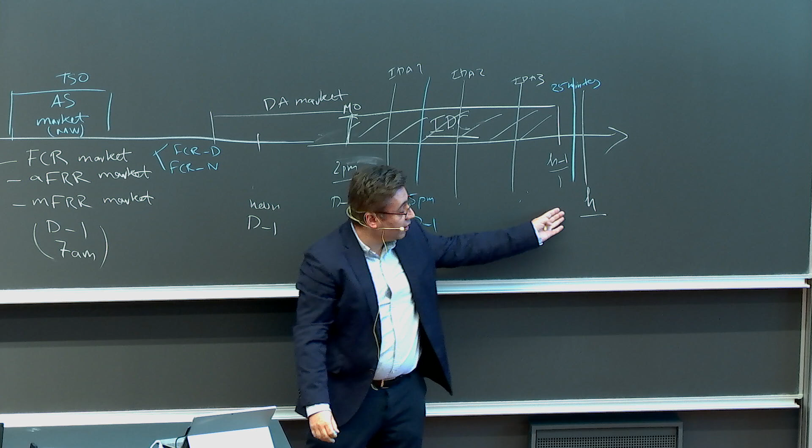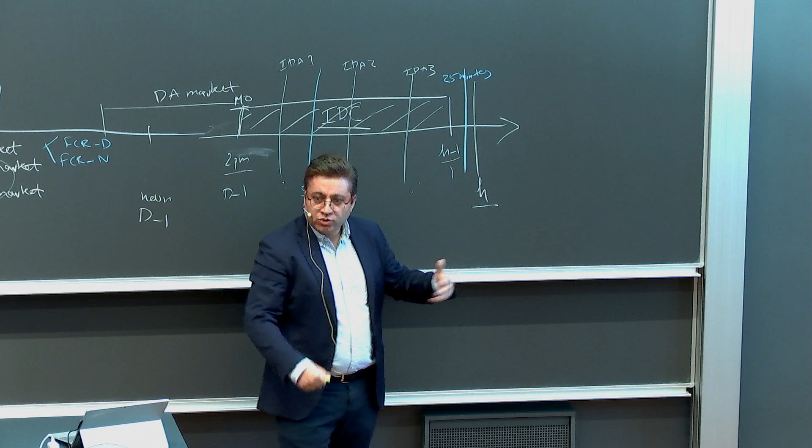So you start from 5 p.m., something like here. So 5 p.m. D-1 is the first time that you have to submit your activation price, and you can update it up to 25 minutes ahead of time. And then for mFRR and aFRR, the TSO just checks who submitted for upward activation, meaning, for example, generators have to produce more. The TSO starts activating the cheapest ones until the imbalance is resolved. And the activation price of the last resource activated sets the balancing price.

But this is changing at the moment in the Nordics and in Europe, because now we have activation for both mFRR and aFRR, so the definition of balancing price is changing to reflect energy activation of both mFRR and aFRR. I didn't teach how it works, but it's good for you to know that. Good. And then we have imbalances, the balancing market. We discussed that now in Denmark and many European countries, the balancing scheme is based on a one-price scheme, while it used to be a two-price scheme.

And we discussed that under the one-price scheme, there might be incentives for some producers to intentionally cause imbalance if they realize they can earn more in the balancing market than in the day-ahead or intraday market. And for that, last session, in lecture number 6, we discussed that Energinet is adding something called full cost balancing. So if you cause an undesired imbalance that doesn't help the system, you should pay not only for energy activation, but also your share of the TSO's cost to procure services to resolve your imbalance, right? So you will be charged for energy activation and also for reservation.

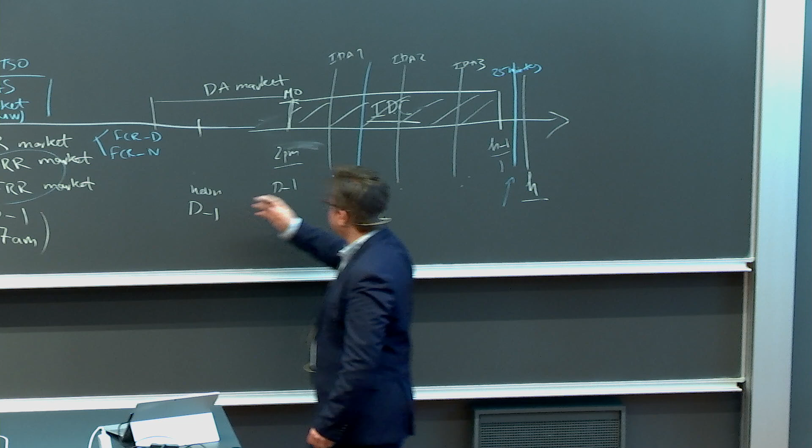Good. Then we discussed that everything we discussed, or in your assignment, the market time unit is 1 hour, but all markets either have been changed or are going to change to 15 minutes. So soon the time granularity for all markets will be 15 minutes. Already ancillary services and IDC have been changed to 15 minutes. For the day-ahead market, under Euphemia, it's going to change next June. Good. Are we missing anything we discussed? Of course, we discussed many things, but do you remember anything else?

Good. So this is the overall picture of electricity markets in European context. And yeah, of course, there are more details that we discussed in the last lectures.

Good. So now let's move on with the lecture of impacts of renewables on electricity markets. So here today I will try to explain you the impacts, the challenges, potential solutions, and also the initiatives that are happening in Denmark, Europe, and maybe globally.

Good. So these are the numbers I got from Stine Rasmussen from the Danish Energy Agency. This shows the Danish energy sector in 1998. Based on this slide, you can see that in 1998, 93% of supply in Denmark came from thermal power units, and only 7% from renewables. You can see the amount of CO2 produced from the Danish energy sector in that year, and also the fuels that supplied power plants in Denmark in that year, mostly based on coal.

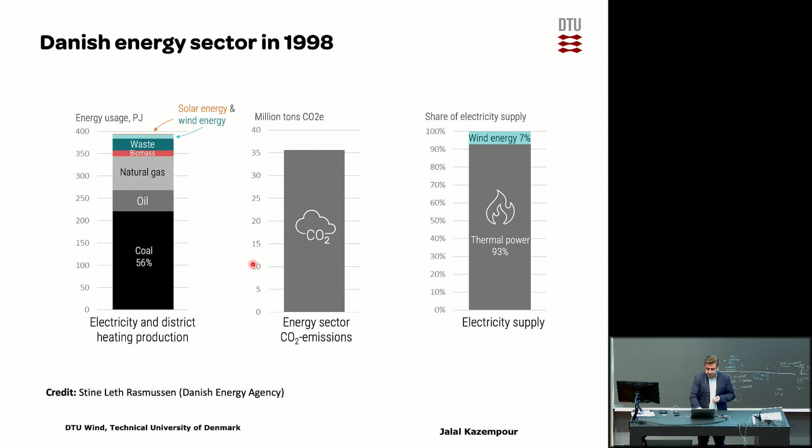And these are the numbers from 2 years ago, 2023. It has been radically changed compared to 1998, right? Now you can see that in 2023, the majority of Danish supply came from wind, 58%, on top 11% from solar. So in total, what? 69% from renewables and the rest from thermal power plants. And of course, the amount of CO2 produced reduced a lot. And also you can see the fuels for the Danish energy sector in 2023.

It's a radical change. And when we talk about systems with high penetration of renewables, this is an example. And the Danish target is to get 100% renewables, right? There are a few countries with that goal, or close to that: Denmark, Ireland, Spain, Germany, and so on. And maybe also some other countries in other parts of the globe.

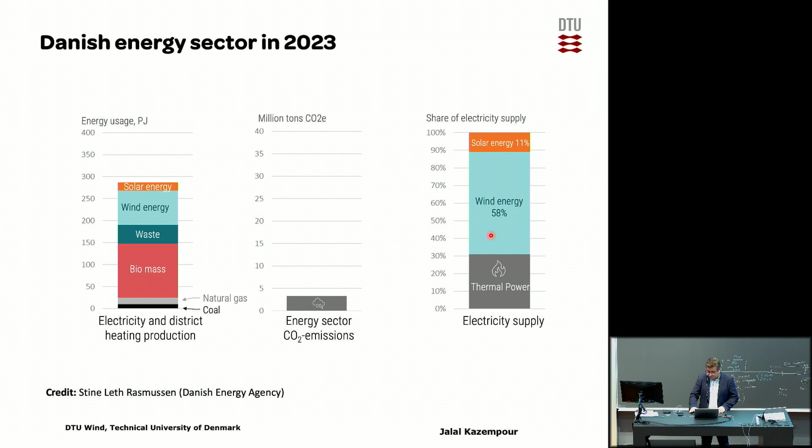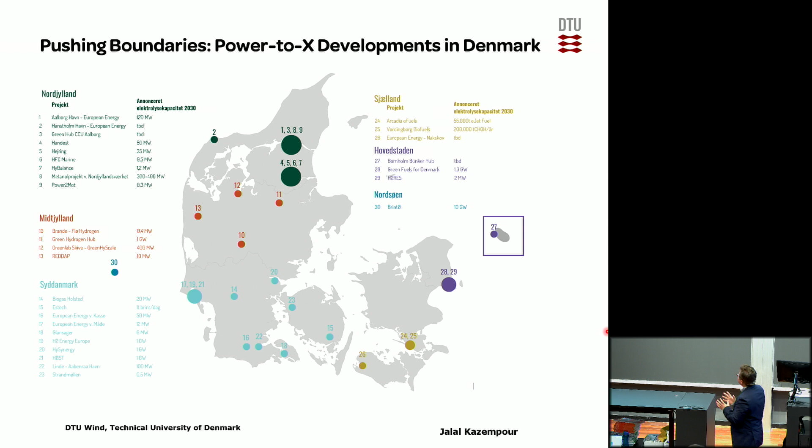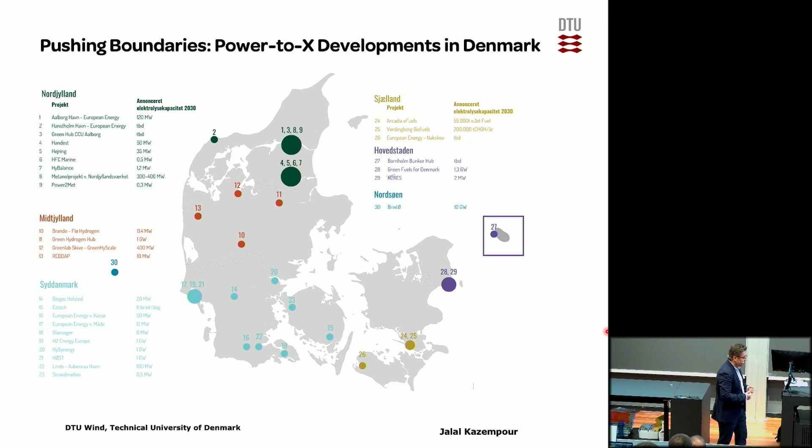So it's not the only ambition in Denmark to get 100% share of renewables in the power sector, but there are other ambitions. For example, these are the ongoing Power-to-X projects to be developed in Denmark. At least this has been the plan. And based on this plan, we expect that by 2030, in 5 years, we are going to have 4 to 6 gigawatt installed electrolyzers. And what do electrolyzers do? They convert electrical power to hydrogen. And then you can use hydrogen in downstream processes to produce different types of green fuels.

But just to get an idea what 4 to 6 gigawatt means, the current peak demand in Denmark is around 5 gigawatt, 6 gigawatt, right? So if we really manage to get 4 to 6 gigawatt of electrolyzers, it means that just in 5 years, the power demand in Denmark will double, right? It's very ambitious. And then you can see how much the government in total would like to support these initiatives and how much CO2 reduction is envisioned.

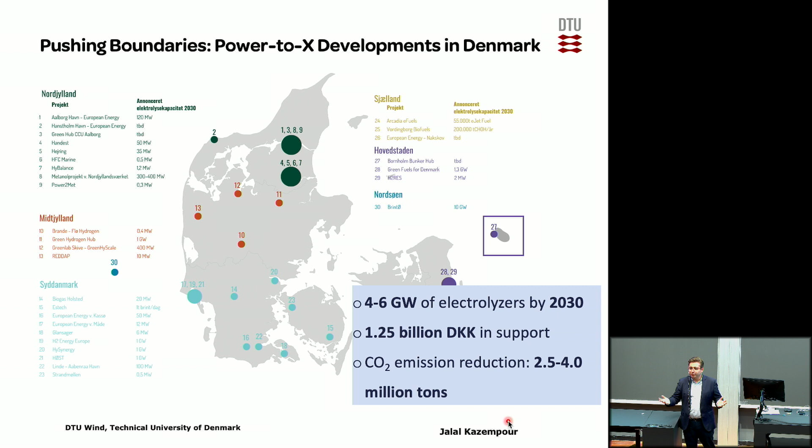So when I was teaching this course 2 years ago, everyone was talking about Power-to-X. It was really a hype, as much as people today talk about AI. But today, there are a lot of ongoing discussions on whether all these projects are financially viable. If you talk to project developers or bank people, they use a word called bankable, whether these projects are bankable or not. Maybe you are taking a course called feasibility studies at DTU, and I think it's this kind of context. Is a project financially feasible or not?

So as far as I know, the problems of the ongoing projects are not necessarily technological, it's more financial. Especially because the investment costs are still high, and also there are questions about financial risks, right? So they became barriers for P2X projects. Whether these projects will be realized or not, I hope they will be. So it's more a matter of time.

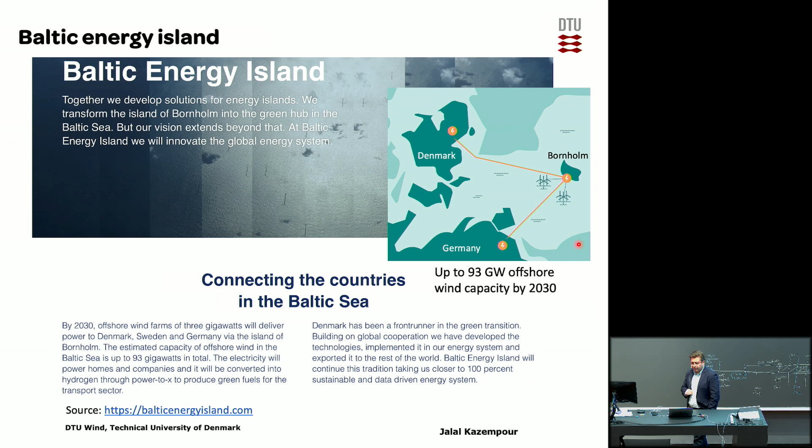The second ambitious energy island project, which has been discussed a lot, is an energy island in the North Sea. And the idea is to build an artificial island here in the middle of the North Sea where the water is shallow, right? The sea is shallow. So you can see that back in February 2021, when I was teaching this course 4 years ago, there was a lot of news, for example, in BBC, explaining, okay, Denmark to build first energy island in North Sea. And it was a big hype.

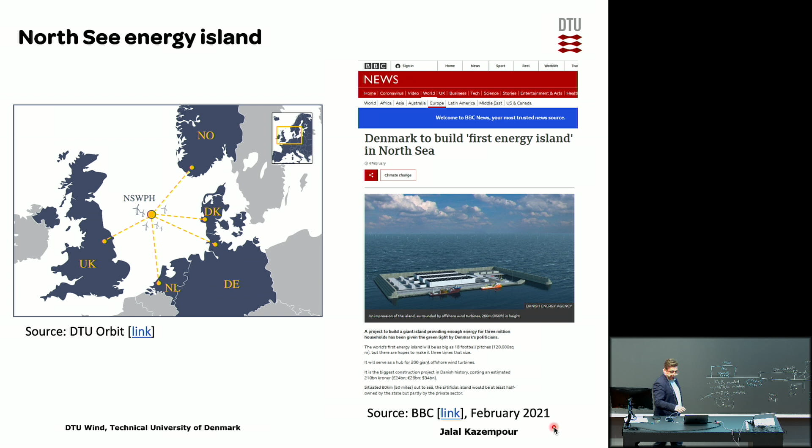So again, I hope I'm not wrong, but I don't think the barrier is technological, more it is financial. But anyway, you can see how ambitious projects we are talking about. And all of them are based on renewables. So you can imagine that renewables are already impacting electricity markets a lot. And this is going to be even more in the coming years if we manage to bring energy islands or

others to the picture. And of course, if you get that massive amount of renewables, you definitely need network. You need transmission grids, and also you need power-to-X projects. Maybe to produce hydrogen on site or in the mainland. So for that, you need to transfer power to the mainland and then make it hydrogen or other green fuels. Or maybe you can do it on site.

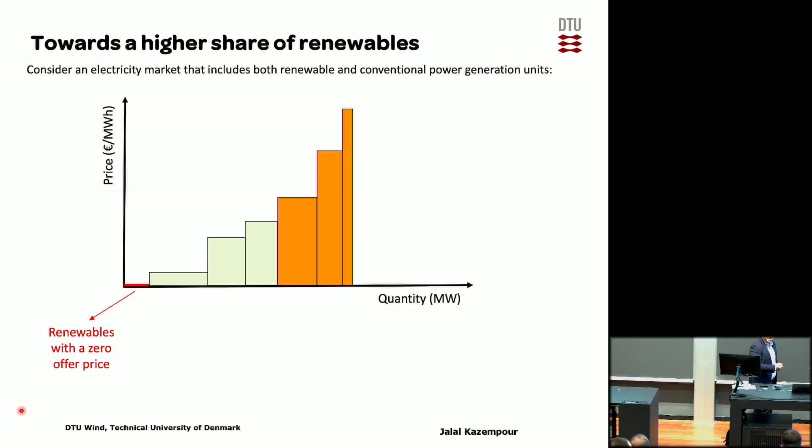So let's now talk a bit more about electricity markets. So that's the supply curve we already saw in this lecture several times. So let's say that the red part in the supply curve is renewables with a zero offer price. You already saw in the page of aggregated curves of Nord Pool or EPEX that there are many hours where many suppliers place a zero bid or even negative, right? Why do they go negative? Because they already receive tariffs outside the market. So it makes sense for them to offer negative and make sure that they will be dispatched.

And then the green ones, you can say that they are conventional units, so they need to burn fuel to produce, right? Or maybe they have other commitments, whatever. But usually they are conventional units, and usually they are less flexible or inflexible units. For example, they might be nuclear or coal power plants.

And then the orange ones are conventional units with relatively high production cost, and they are typically flexible. For example, they might be gas-fired power plants. And since gas is usually expensive, their marginal cost, their offer price here, is high.

Good. So let's say that in a certain hour, this is the amount of demand we have. Of course, we also have a demand curve. You already saw it in the Nord Pool page. But imagine that here the demand is fully inelastic to price. So that's why it's a vertical line. So then, if this is our demand, then the market price is there, the intersection of the supply and demand curves.

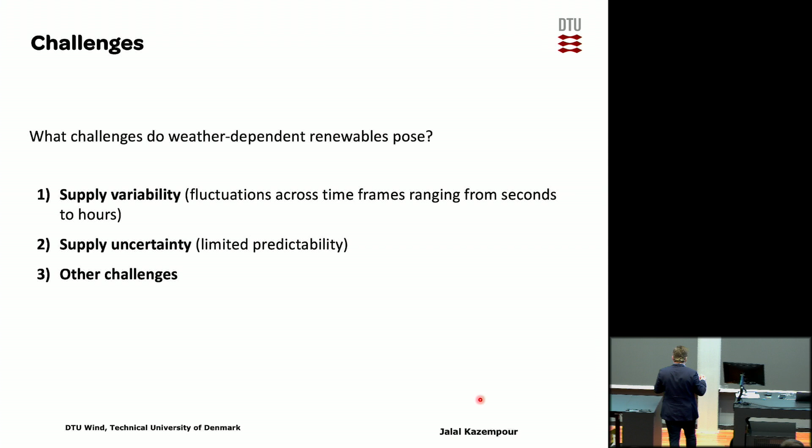In this slide, what I really like to emphasize is that uncertainty and variability are two different things. Many times I see that people confuse them and use them interchangeably, but they are not. When we say renewable energy is variable, we are not talking about stochasticity. We are just saying that over time, the wind energy in megawatt hours might be something like this. Over time, there is variable production.

But stochasticity means that it's challenging to forecast it beforehand, and if you want to forecast it well in advance, it becomes even harder. So if you like to forecast for the next day or the next week, it's something like this, or even bigger uncertainty. For any production here, this range shows a distribution of potential production.

For example, it might be a distribution something like this. It means that most likely the production will be this. It's a distribution function, right? But any production in this range might be possible. And here I put a large range. Sometimes it's very uncertain how wind or solar power production will be. So I hope it's clear how variability and uncertainty, or stochasticity, are different. Clear? Good.

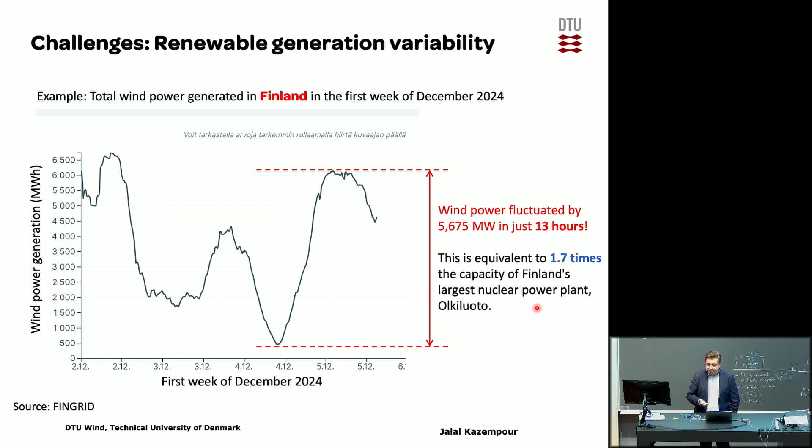Or this is another example from Belgium, and I got this data from Elia. Also, Elia provides a lot of good information and visualizations on their website. So this is February 2021. I kept this figure from 4 years ago when I was also teaching this course. And you'll see that in that specific month, the minimum of the total wind power production in Belgium was 40 megawatt, and the maximum was 2,159. So a huge change in wind power production. So you have to be ready for that.

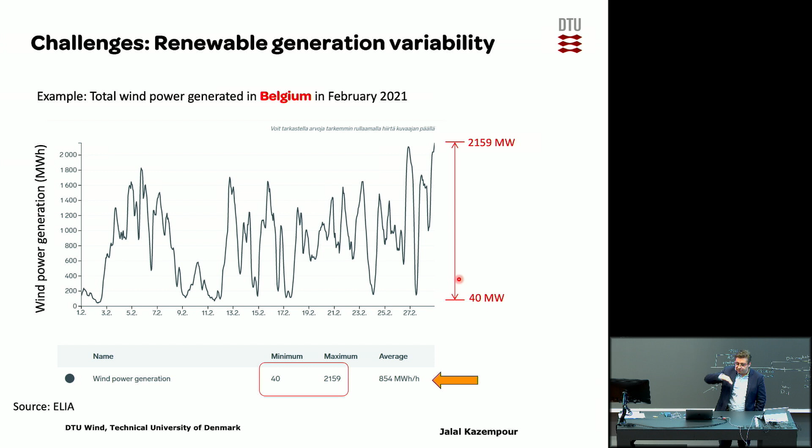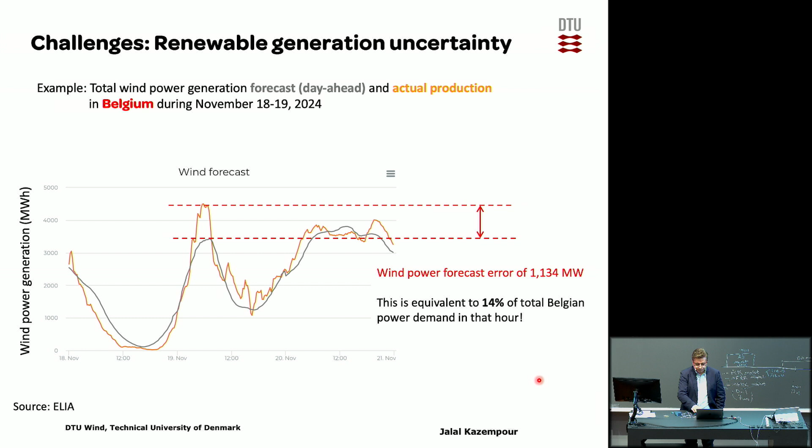So when you have a huge amount of renewables, you should think of ways to solve challenges coming from variability and also uncertainty. Can you think of other challenges? The lecture is about impacts of renewables on electricity markets, right? What other challenges do we have?

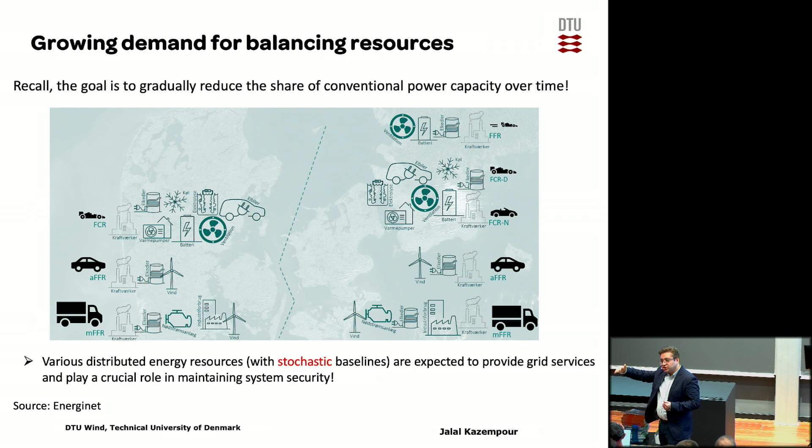But that baseline is stochastic. For example, imagine you control thousands of EVs in your portfolio, and you can provide FCR services. But how much FCR you can produce depends on how much these 1,000 EVs will consume every 15 minutes of the day after. Do you know it a day before? No. Is it easy to forecast? Not necessarily. When do you need to submit your bid for FCR services? A day before. A lot of stochasticity.

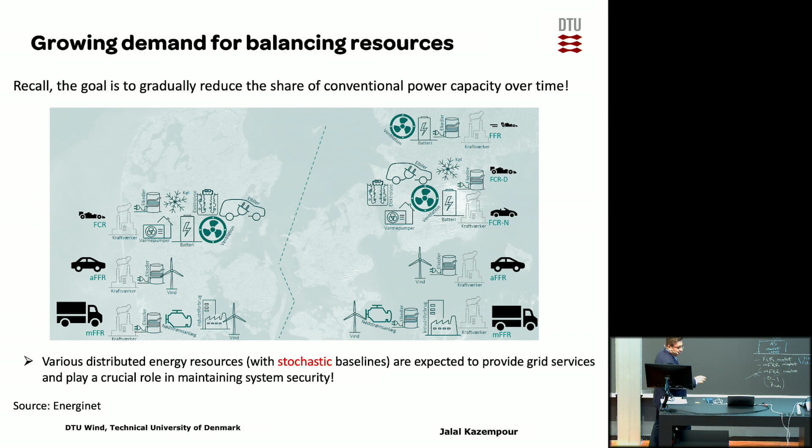Good. The other problem that renewables pose is grid problems. It's not directly a problem from renewables, but to be able to transport renewable energy, you need grid. Well, first think of big projects like energy islands, either in the Baltic or in the North Sea. If you manage to produce a lot of wind power in the middle of the sea, you need a way to transport it to the mainland. So building new transmission lines itself is a big project, both technologically and also, most importantly, financially.

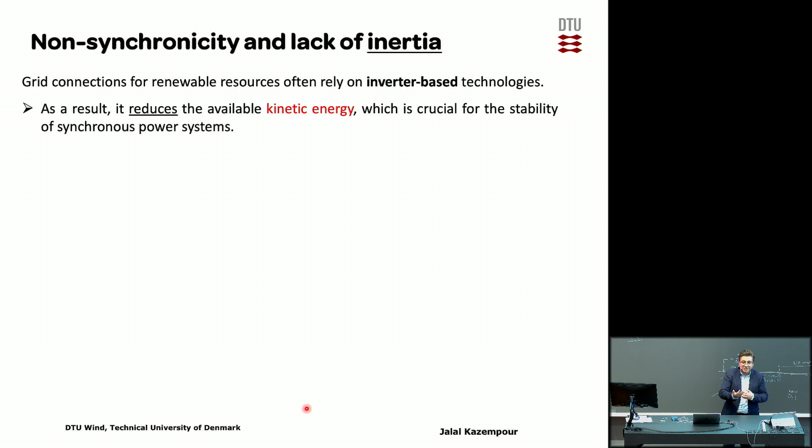Well, for example, that's a figure I got from this ENTSO-E report, European Network of Transmission System Operators. It shows the effect of amount of kinetic energy on the behavior of frequency after a loss of production with and without FCR. So let's say that we have FCR services. We activate FCR, but how is the profile of getting frequency back to the nominal of 50 hertz? So you can see how fluctuating it is when we have less kinetic energy in the system, less inertia in the system, right?

So having low inertia systems because of more and more renewables is a problem. But again, it's out of my expertise. But our colleagues, especially in control theory and also fundamental power system colleagues, are working on something called grid forming technologies, still based on power electronics, to help improve the inertia of the system. Okay?

So you can see that adding more and more renewables poses a lot of problems in terms of variability, uncertainty, market problems, grid connection problems, and also stability problems. And we should be able to find solutions for all of them. If we don't find solutions for all of them, then it becomes a barrier for more integration of renewables.

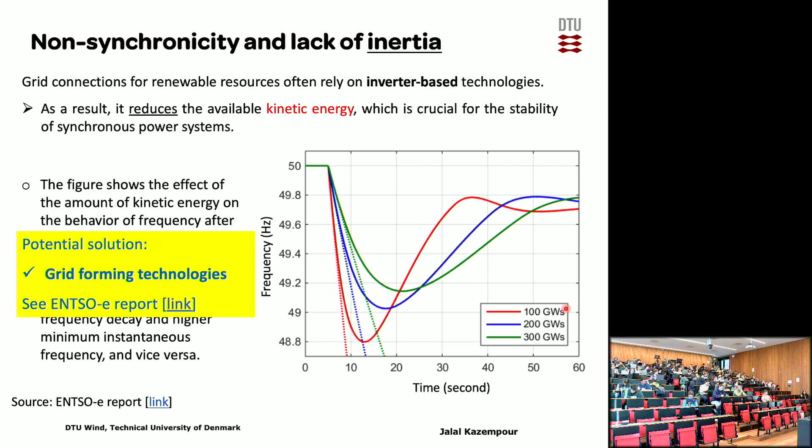There are. Yeah. For example, these grid forming solutions. There are good solutions. Okay, what I'm saying is also a personal opinion. I think for most of the challenges, we have good technological answers. The main barrier is the financial problems, I would say. So that's why learning about energy economics and markets helps, right? So for most of the challenges, I think we have technological answers, not financial answers. Did I answer your question? Good.

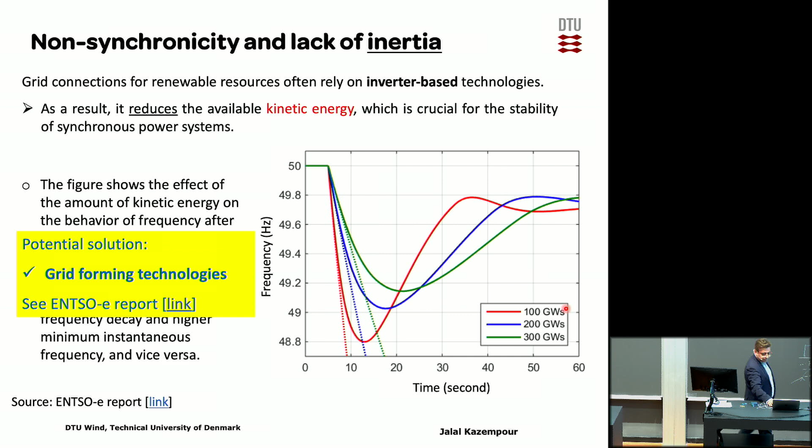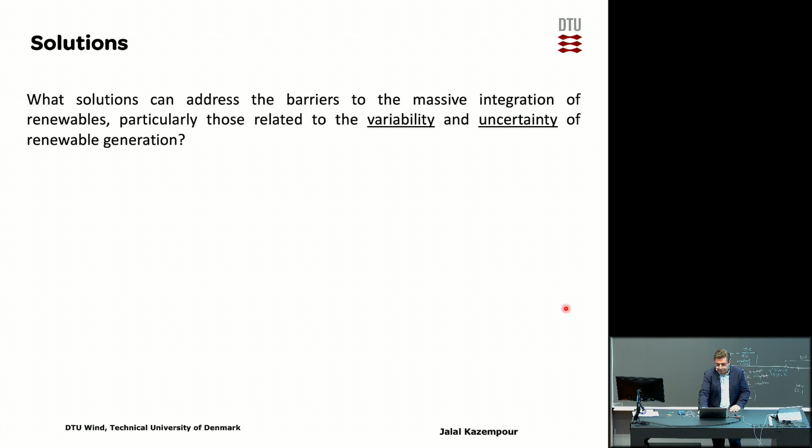I'd like to share some solutions with you, but I'm not saying that these are all the solutions. Some of the challenges still have open questions about how to resolve them. But here I mostly focus on challenges related to variability and uncertainty of renewables. So let's get back to the market context. For our challenges, we can think of different solutions: defining new market actors, new players, I'll give examples. Maybe we can think of exploring new resources for balancing, if the problem is the balancing resources.

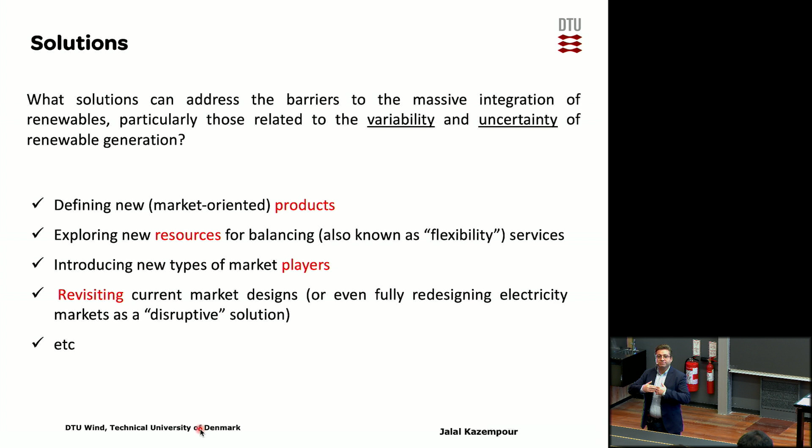Maybe we can think of new products. For example, FCR is a market product. Intraday trading is a type of market, and the bid is a type of market product. Maybe a bit more radical thinking: maybe we can think of revisiting current market designs. And of course, when we're talking about revisiting, you can think of very radical changes. Maybe you can argue that in 10 years, the way we clear markets today, based on what I explained to you, doesn't make sense at all, right? So these are open questions, actually.

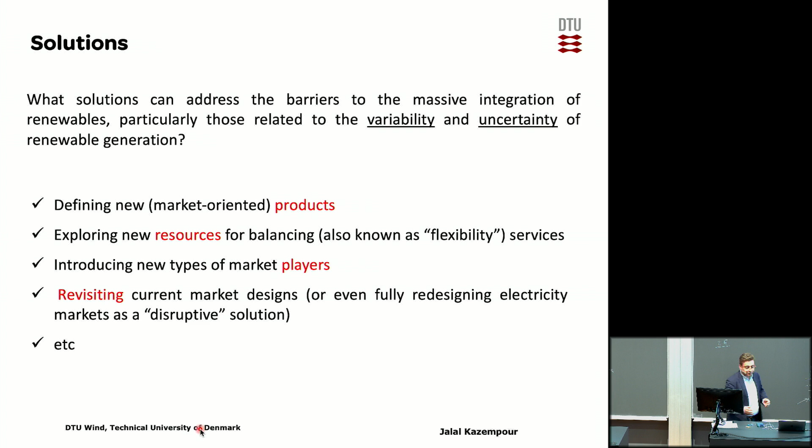So let me give you a few examples. When I say new products, what kind of products am I talking about? You saw the duck curve in California, right? So CAISO started thinking, oh my God, I have to do something. In the duck curve, you saw the net load change. In the matter of 3 hours, there is a need for a 13 gigawatt increase in supply. And as I said, the problem is the lack of ramping capability, not the lack of generation capacity. Maybe our generation capacity can handle this ramping in 6 hours, not in 3 hours.

So because of this problem in California and later in MISO, the Midcontinent Independent System Operator in the Midwest, they started adding a new market product called Flexiramp, standing for Flexible Ramp Product. Have you heard of it?

So that's a new product to be able to solve the problem. One way of thinking is that, okay, we have ramping problems. Do we have enough capacity in generation? Let's go and invest in more very fast responding generators. That's one way of thinking, but very costly. The other way is thinking in a more market-based, market-oriented way. So here they define this product.

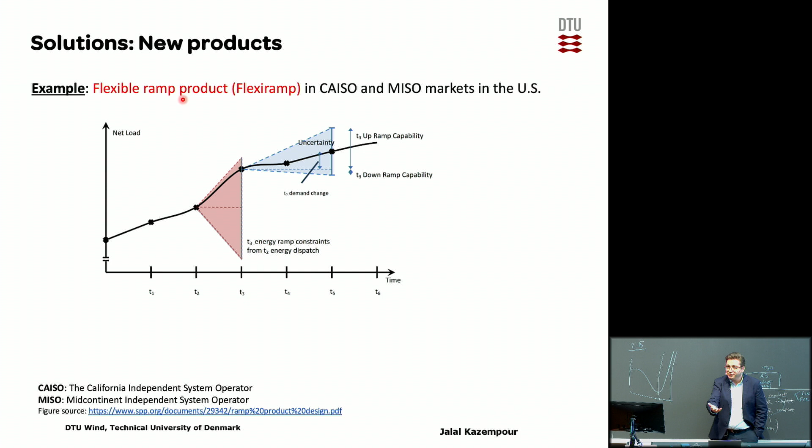What it shows is that, for example, based on the net load forecast, the system operator, for example CAISO, reserves a certain amount of flexi ramps at hour 3. So you see that at hour 3, we can have a forecast of how much the increase of net load will be. You can have different scenarios. And then you reserve some fast generators for providing ramp in certain hours.

So for example, if you have a very fast responding generator with a capacity of 100 megawatt, you can say that, okay, I pay you, don't dispatch at full capacity of 100 megawatt. Let's, for example, dispatch you 50 megawatt and leave 50 megawatt of you for increased change in production in 2 hours. Is it ancillary services? No. It's a ramping service.

Are you following me? And of course, here there is opportunity cost because we are asking this generator to not be fully dispatched in the day-ahead market, for example. We keep them ready for sharp increase when we have problems. So of course, for this flexi ramp, we have to pay that generator. So in the US, in California, there is a market for flexi ramp. There is a price for flexi ramp. And then generators bid based on their opportunity cost. Is it clear?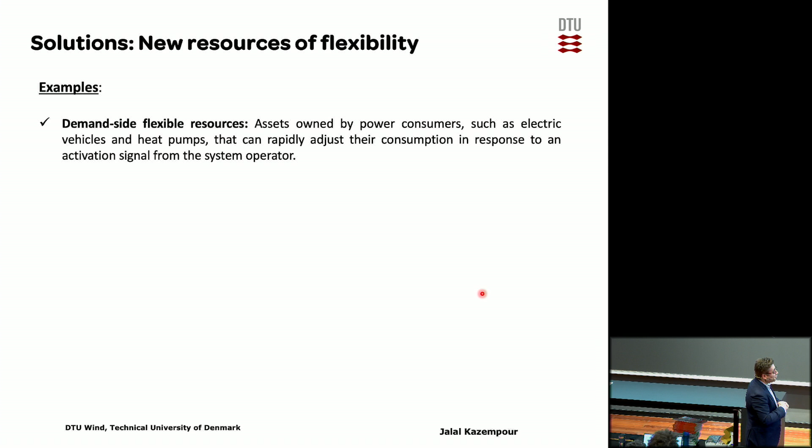Or water pumps. If you want me to name a few companies, you can think of IBM, for example. They are active in Denmark to design something called Flex Platform, that pools different assets and then offers different asset service models. Or different companies like Neogrid or others.

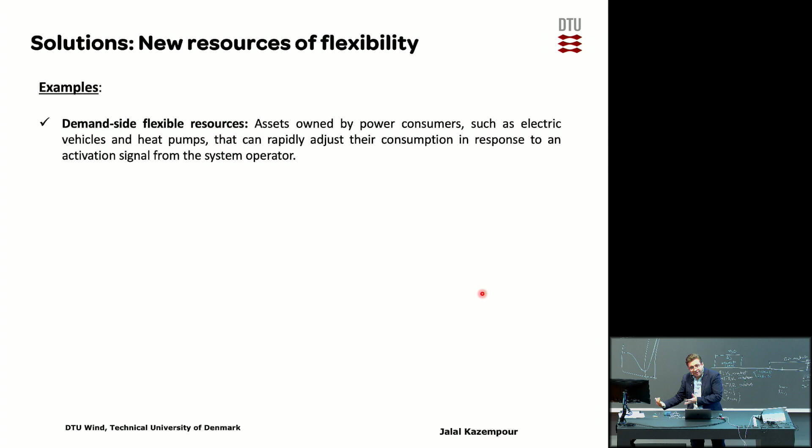And mathematically, their problem is also very interesting because they have to pool different assets, manage uncertainty, make decisions under uncertainty, and bid in the different markets while forecasting what the price will be. Very interesting decision-making problem, while fulfilling the physical constraints.

One important thing that I mentioned, maybe in lecture 2, is that most of these resources are located in the distribution grid. For example, electric vehicles or heat pumps. And if you would like to provide ancillary services like FCR, mFRR, these are services for the transmission system operator, for the TSO.

So what happens is that if we have frequency problems or imbalance problems, the TSO will activate these local resources in the distribution grid, right? So maybe the TSO's problem is solved, TSO is happy, but maybe activating them will cause local problems to the DSO. So TSO is happy, but DSO is unhappy. What happened? So here, that's why TSO-DSO coordination is very important, is essential.

So to be able to fully leverage the flexibility of demand-side resources, we need to make sure that TSO and DSOs are coordinated. For example, one easy way, maybe easy is not the right word, is that to be able to go and bid in the FCR market, you should get eligibility qualification, a green light from the DSO. You say, okay, I want to bid maximum X megawatt in the FCR market, then first the DSO should check it. If that happens, will there be any local problems or not? If not, the DSO says fine, green, go, and then you go and participate in the TSO market. That would be one way.

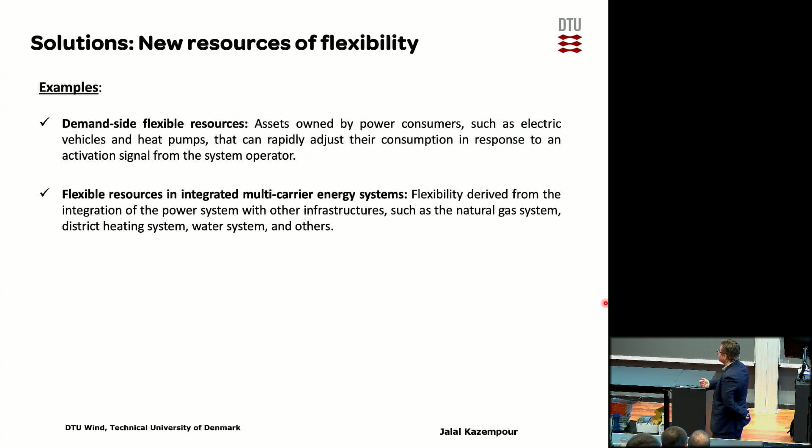Another resource of flexibility is multi-carrier energy systems, right? For example, there are assets in the intersection of the power system and other systems. For example, the heat system. Think of heat pumps. Or natural gas, gas-fired power plants. They are flexible, but they are also connected to the gas network. They are gas demands, right? Or maybe you can get flexibility from the water system by tuning the power consumption of water pumps in the water system.

So, for example, you can think of combined heat and power units, CHPs. You have one in DTU campus, right? A small one. So a CHP can produce power and heat at the same time. But you can play with that: how much power, how much heat to produce, and at different operating points there are different efficiencies. Right? So whenever in the power system you need flexibility, maybe you can play with the CHP schedule, with the CHP set point, and get flexibility from that.

But what is the cost, or what is the problem? By doing that, you are also changing the heat production of the CHP. So maybe you are propagating your uncertainty from the power system to the heat system. You're just propagating your problem to a different sector. So before doing that, you have to make sure that the heat sector is ready for that. Are you seeing the problem? So what I'm talking about is a systemic risk.

People think that if we integrate more and more sectors together, it's good. The system becomes more resilient. We can get flexibility from the heat system, from the gas system. So in the power system, if we have problems because of renewables, we get flexibility. But what we sometimes don't see is that we are propagating our uncertainty from the power system to the heat system, to the gas system, to the water system. It is fine as long as they are ready and it doesn't cause problems in other sectors. Otherwise, we may just be propagating the problems from one sector to another.

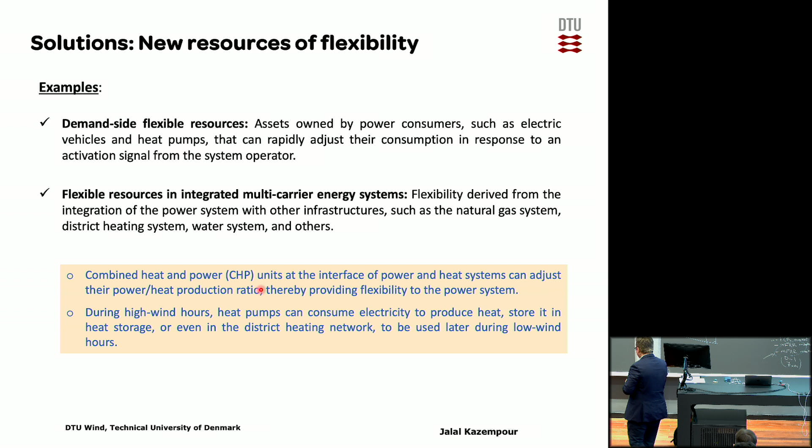Is it clear? And in the worst case, what will happen is cascading failure. The power system fails, now we push the failure to the heat system, and it will fail. So that's why, again, to fully exploit this flexibility, proper coordination between the power system operator and the heat system operator is essential.

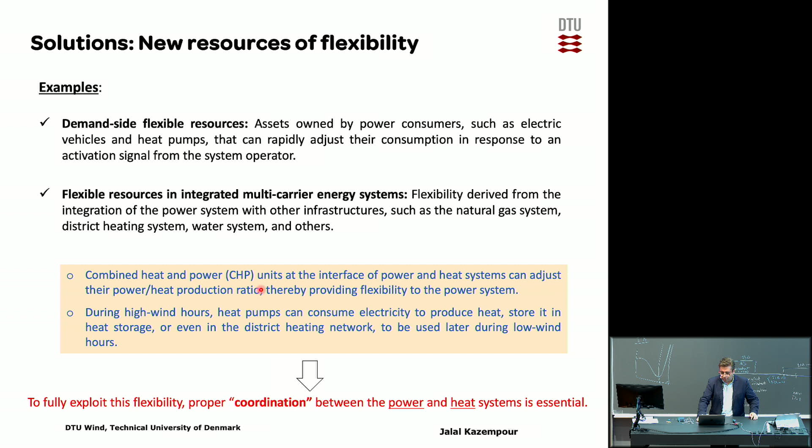Or you can think of the same for gas power plants. Gas units, gas-fired power plants, can provide us flexibility. So when we see fluctuations in the power system, we can ask a gas power plant to kill the imbalances, right? But this means that the gas demand is also fluctuating. So then maybe we are going to have problems in the gas network.

But there is one extra degree of flexibility in the gas network, and the same in the heat sector, I forgot to mention. And it's the stored gas or stored heat in the pipeline. The stored gas in the pipeline we refer to as linepack.

Right? So maybe, as I said, the gas demand is changing because of the variant gas consumption of gas-fired power plants. But maybe having linepack, stored gas in the pipelines, helps us to keep the gas network balanced and working healthy. So to be able to use this flexibility of linepack, again, it's essential to have proper coordination between the power system operator and the gas system operator.

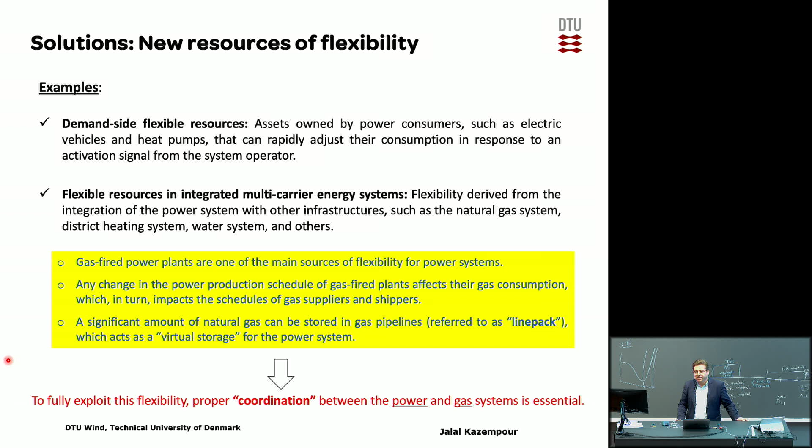Also, you can think of electrolyzers, power-to-X assets. Electrolyzers are consuming power to produce hydrogen. Are electrolyzers flexible? Yes. But you should be careful of the degradation. But the problem is that most of the time, electrolyzers may have a constant contract with hydrogen off-takers.

So maybe you are not very flexible to play with the consumption of the electrolyzer, because the more variability the electrolyzer consumption has, the more variability you have in hydrogen production. Of course, you can say that I can have a hydrogen storage, but it's very expensive and hard to have it, right? Good.

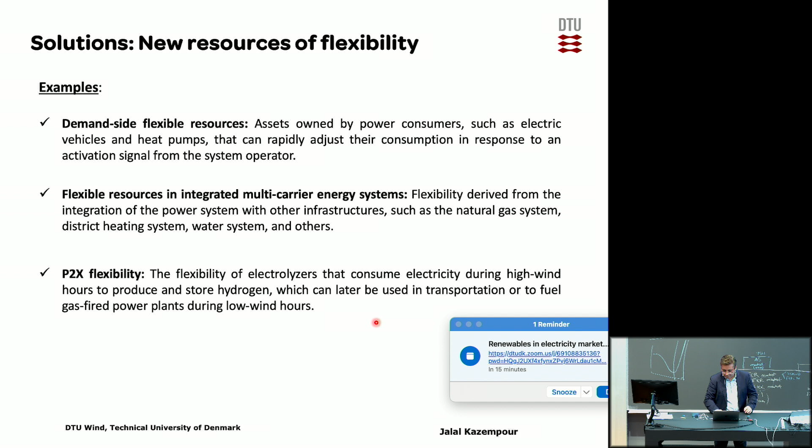He graduated. So his job was exactly to see how we can pool different types of flexibilities from different assets, bring them to the Flex platform, and then bid in different markets. So you can think of, for example, a pool of 1,000 EVs. We did that. Also, you can think of one big plant, industrial plants, for example, as a big demand consumer.

So we checked a plant in Jutland for steel and also for a galvanizing process. It's a big thermal plant. And then you see how much flexibility you can get from that plant for electricity consumption. Okay? So they have a furnace, and you see how much flexibility you have for that plant, and you can play with the consumption of that plant to produce different types of, for example, ancillary services.

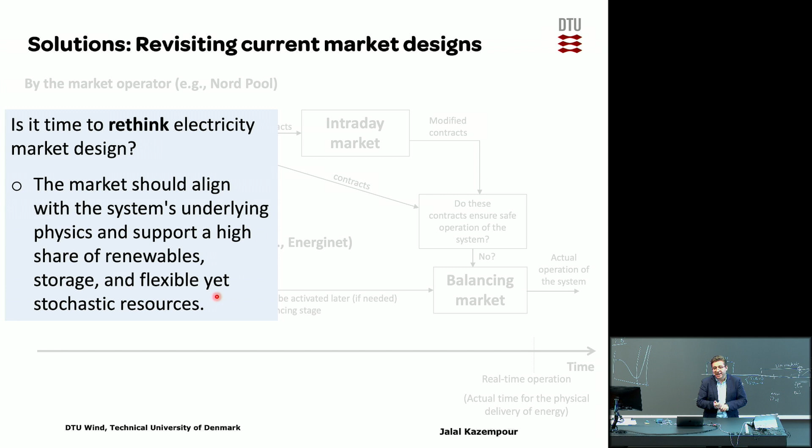Alignment with physics of the system, supporting high renewables, and supporting stochasticity of renewables and flexible resources. But whatever design you think, there are certain things that you should check. And the most important thing is efficiency, right? We discussed that. Your market design should promote maximum social welfare. If your market design, whatever it is, doesn't bring maximum social welfare or it's not aligned with maximum social welfare, if it's not aligned with Nash equilibrium, meaning that no one wants to deviate, then maybe it's not a good design.

Incentive compatibility: it means that the market should incentivize market players to bid truthfully, to truly reflect the operational cost in their bids, not more than that. So whatever design you think, it should be able to guarantee cost recovery. It means that your profit will be minimum zero, but not negative, right? If you participate in a market where you may earn not only nothing, but you may lose, you will rethink: do I really want to go into that market? So you need to provide a certain level of assurance to market players to enter that market.